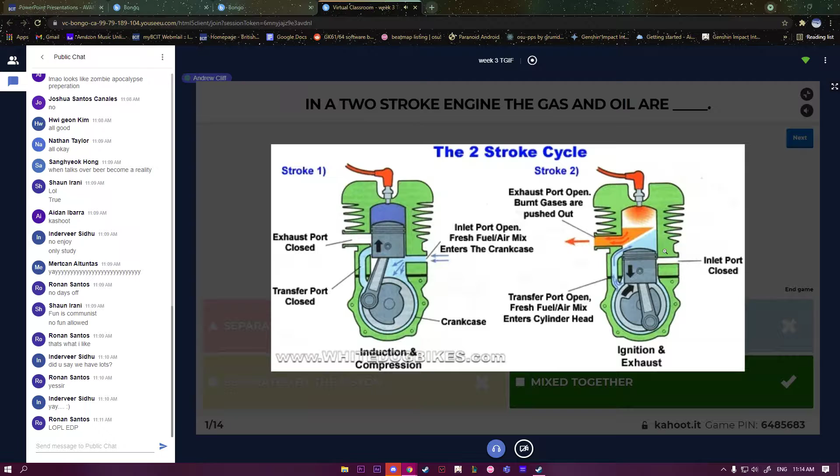You have the exhaust gases rolling out. Maybe some might sneak out here. It's kind of the inefficiency of the two-stroke engine. And the whole thing happens over again.

Right? Yeah. I was wondering about all those capitals. It's to wake you up. Yeah, we don't have valves. We have ports on a two-stroke.

The Kahoot always freezes on the previous win screen. Are you looking at the Kahoot through Bongo? I guess you have to, don't you? Oh, phone, yeah. Upgrade. Boon baboon. Oh, I see. Very good.

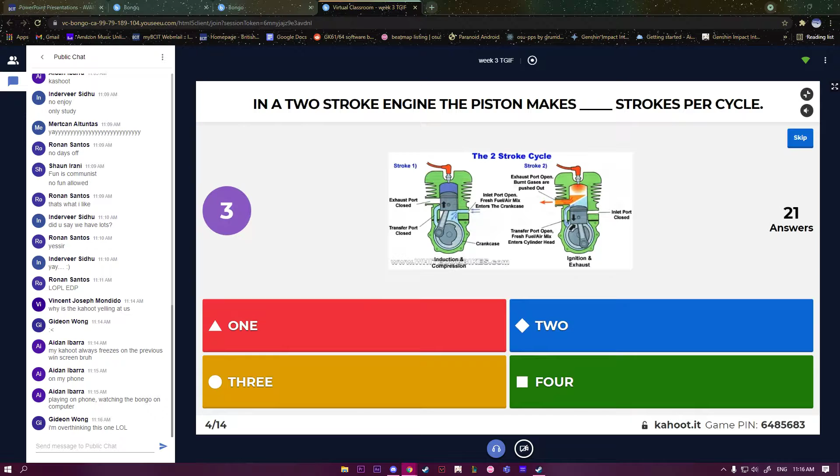Well, the crankshaft moves the piston, but it's the piston that actually covers and uncovers the ports. Ooh, this is a hard one. And still, my goodness. In a two-stroke engine, how many strokes are there?

All right, must be a Friday. Your brains are already on vacation here for this weekend.

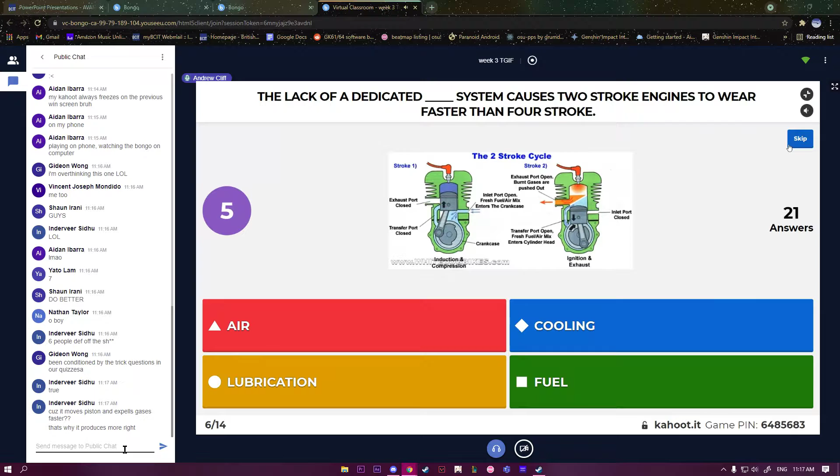True. Yeah, some of the unburnt fuel makes its way out. It sneaks its way out of the exhaust sometimes. And we also have oil mixed in there. It's burnt up. Yeah, Andy, that's another reason too. Yeah. Okay, good. We haven't talked about cooling systems yet. I think that's next week.

True. What prevents engines, not necessarily four-stroke, but engines with a wet sump, like your engines in the shop? Imagine you turn that engine upside down and all that oil in your oil sump, where's it going to go? It's going to want to follow gravity and it's going to go in places we don't want it to go.

Now, as an airplane's flying and banking, the G-forces normally keep the oil at the bottom, but if we're doing things like rolls or loop-de-loops or dogfighting like a military aircraft, wet sumps wouldn't work. Two strokes, it's all good. Now we can have a dry sump system, which we'll talk about next week, where it gets rid of that problem. Lubricating oil.

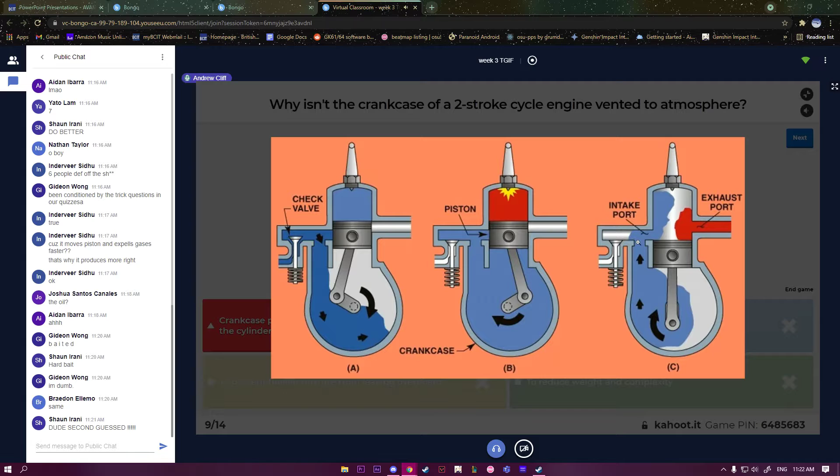Case is vented to atmosphere. No, not on a two-stroke. It is on a four-stroke. To prevent air-fuel mixture from leaking overboard. Well, that's not a bad answer. That's a second place answer. But the best answer is crankcase pressure is used to force the fuel air mixture into the cylinder.

Oh. Well, the check valve's only on the intake side of things. So yeah, it prevents that air from going back out. We want it to get squeezed into the combustion chamber. And we open it to let it in.

But when this piston comes down to squeeze this crankcase air down a bit, we don't want it to go back out there because then we lose our pressure. A little bit of pressure build up. So when this transfer port is exposed, the force of the pressure helps bring that air fuel oil mixture into the combustion chamber.

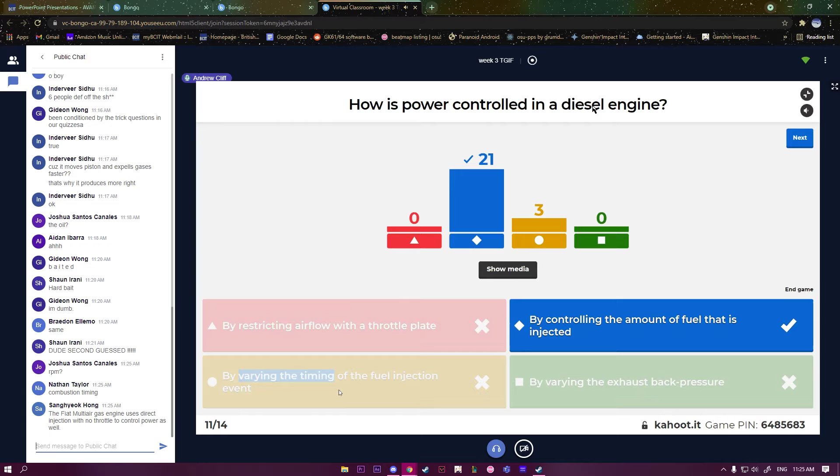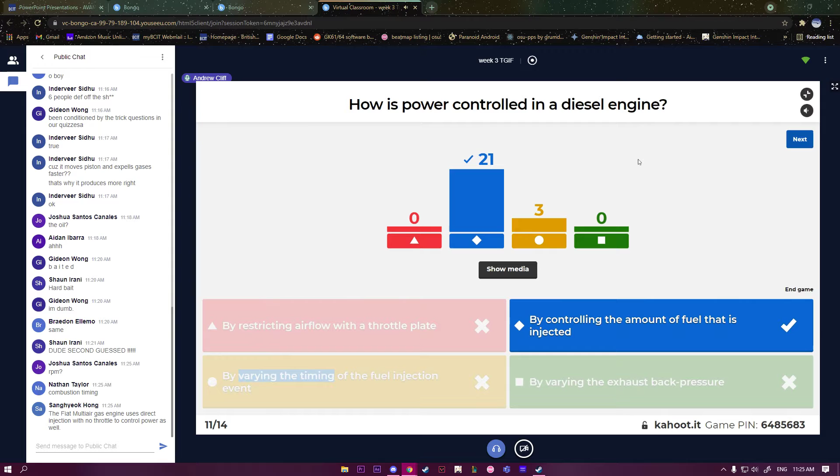The Fiat multi-air gas engine uses direct injection, no throttle, control power as well. Is that a diesel engine? No, you said gas engine. Interesting. Lots of interesting engines out there. But we're learning this old aviation technology. Fixed timing.

Yeah, for cold weather starting. It's not an igniter. We don't need an igniter because we have that high pressure, high temperature compression, which ignites our fuel. Just for when things are cold. Whoa. We can't have detonation. Okay, there seems to be confusion about this here.

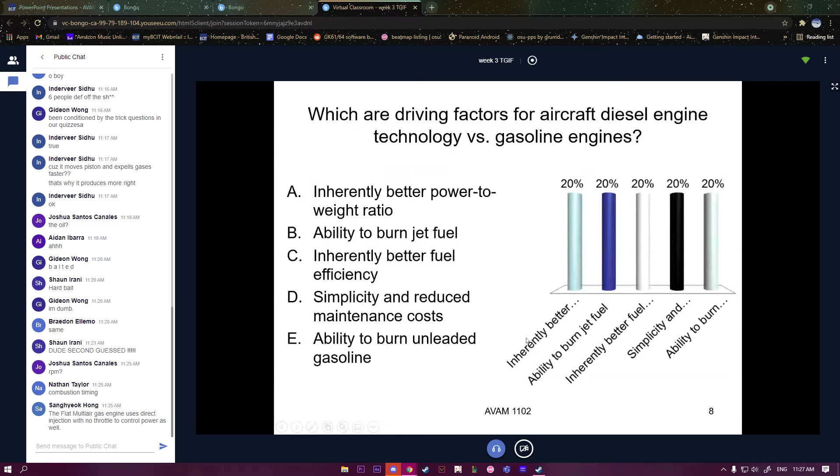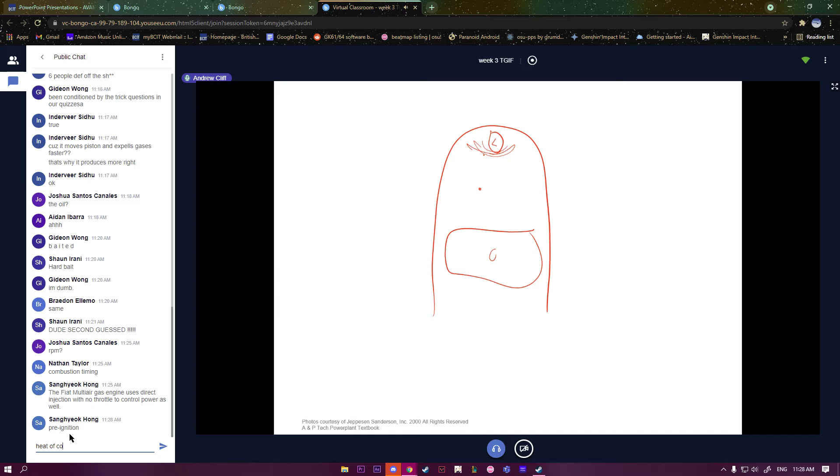Okay, do we know why we can't have detonation? What is detonation again? Detonation is when our air fuel mixture ignites, not at the spark plug. Well, it does ignite there too. But we have this nice uniform pressure wave. But then if we get too high a pressure somewhere, it's going to ignite.

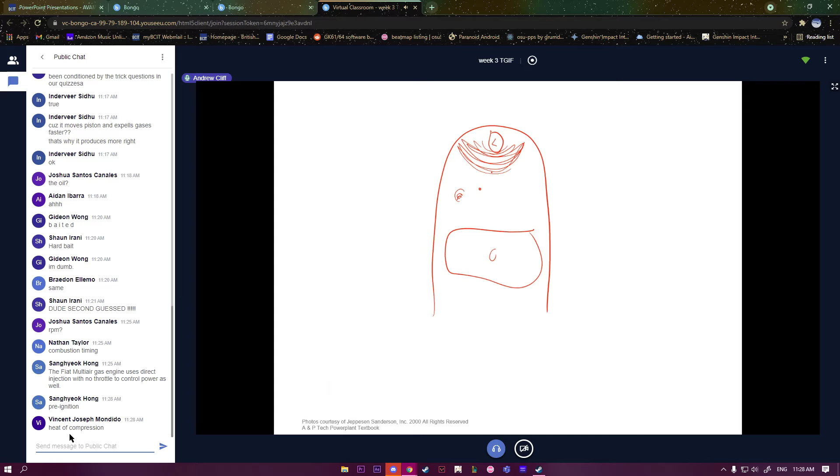So the difference between gasoline and diesel is with gasoline, this whole area is filled with air and fuel. So we could have ignition because we have air and fuel anywhere in here. We can get these little detonation mini explosions happening. When those pressure waves collide, then we get another little one, right? That's detonation.

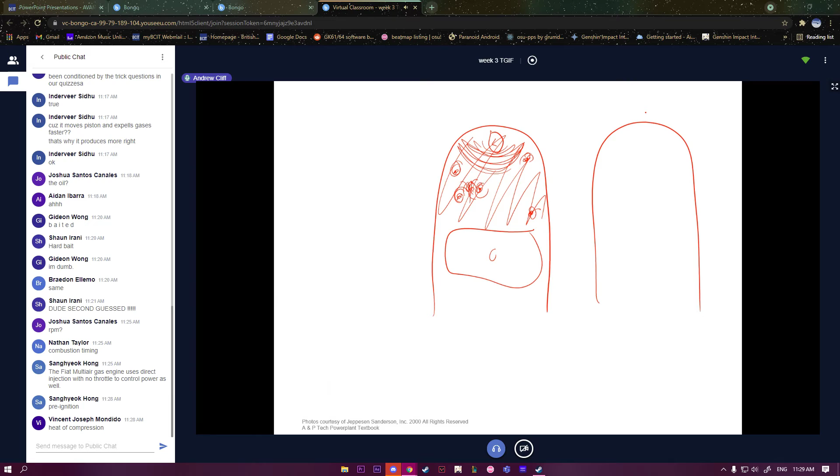Now, in a diesel, where we have our fuel injector, let's say the pressure's too high here or too high here, it doesn't matter. We only have fuel coming out of this one source. So that's why we can't have detonation. The pressure is so high in here that it ignites the fuel as it shoots it. The fuel is ignited instantly, okay? And then we get our flame front coming out of there.

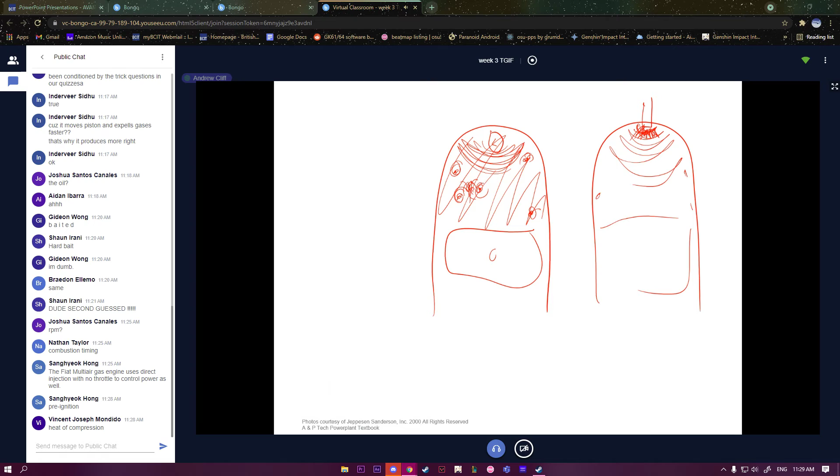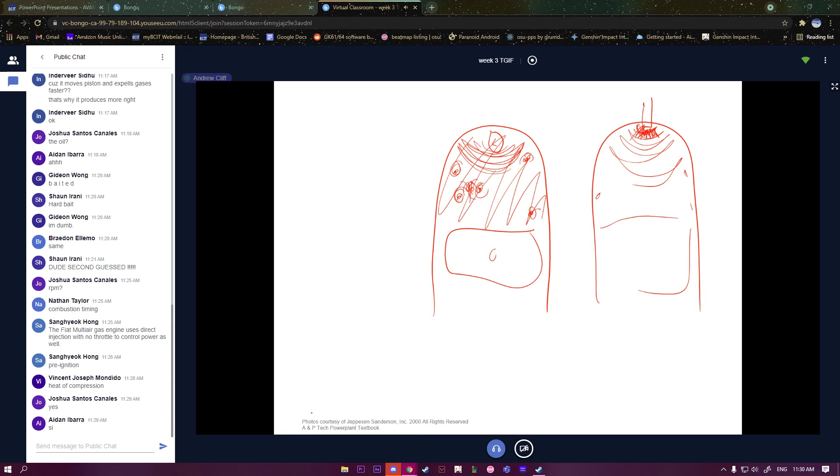Comprende? Sí. Last one. I thought you comprended. Okay.

Yeah, and a gasoline engine, if it's fuel injected, we have fuel coming here. The valve, of course. So if that valve opens, we have fuel in the intake. Our fuel and air is sitting here, so it has a potential to burn in there. Diesel, we have the valve there, but still our fuel source is at our fuel injector here. So it's not going to want to do that.

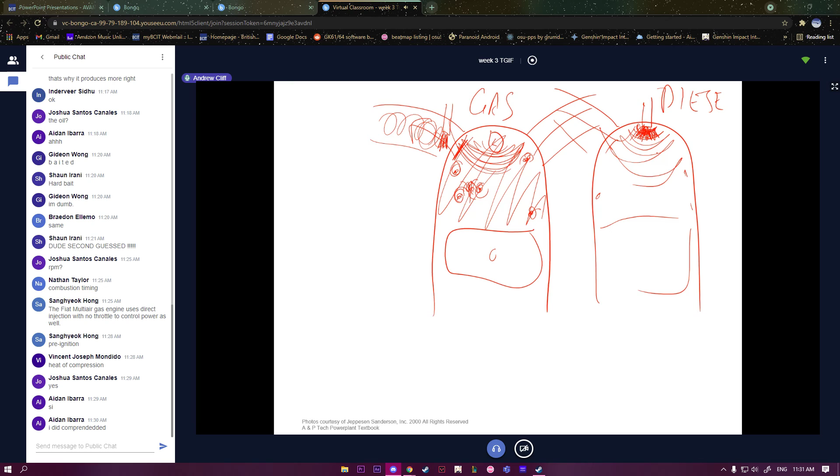Very good. So we can only have backfiring or afterfiring if we have fuel. Well, I guess we could have afterfiring in a diesel. Right? If it burns and maybe this thing's spraying out too much fuel, continues to burn out there, we can have an afterfire. But backfire, no, because if this valve opens, the force of the air is going to come in this way. And there's no fuel in here. So we can't have a backfire.